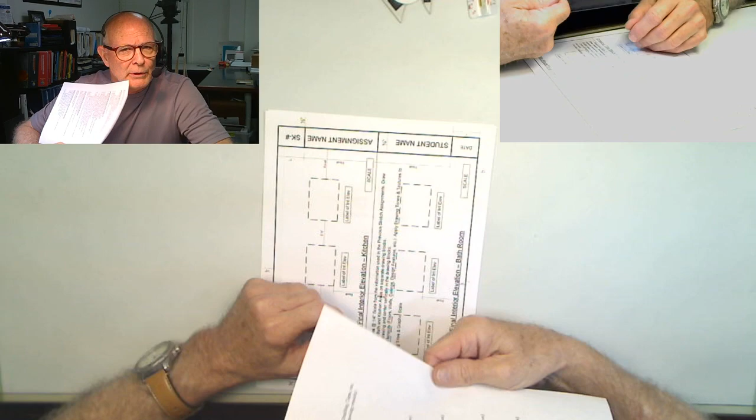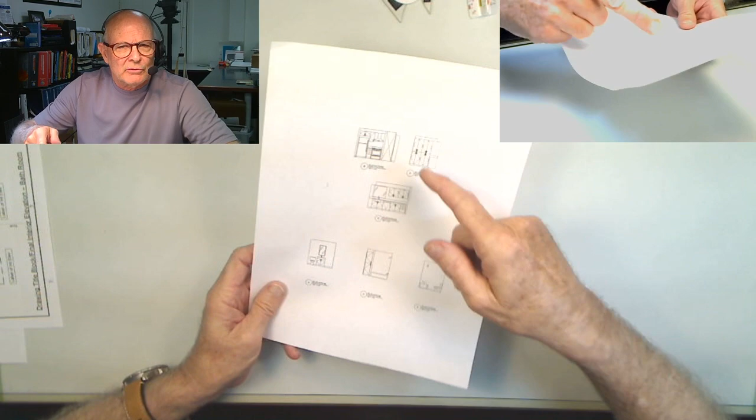As before, it's probably good to pull up some information that will be helpful during the assignment. I suggest you print out or at least have available the assignment so you can refer to it in case you need additional information. You'll want to get a copy of the drawing format so you'll know where we're going with the finished project, and some additional information in terms of example elevations that we can compare to as we progress with our own drawings. So having that available is a good starting point.

It's probably appropriate to stop at this point and think about these drawings as being just a continuation of those orthographic drawings we've been working on for quite a while now. These are, as I've referenced in the lecture, multi-view drawings. That description tells us that these multi-view drawings require multiple different illustrations to show one object. These interior elevations are just part of that group of drawings.

By the way, these are very important to interior design. These are some of the most prominent drawings that interior designers use in establishing the design as well as documenting the design requirements. So it's probably appropriate at this stage to take a look at some information we looked at in the lecture, maybe in a little bit more detail.

That detail has to do with the orientation of the interior elevation. We have a symbol that is used to represent the interior elevations that need to be represented. It's basically a square turned on 45 degrees with a circle in the center. This is an enlarged view of the symbol - the symbol is typically much smaller and is represented down here.

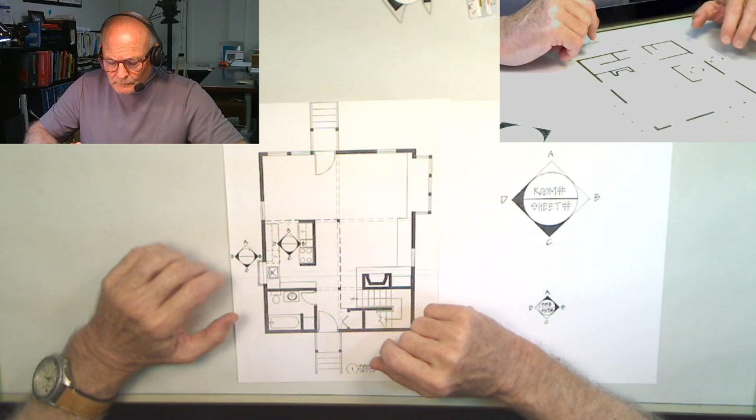So how does that really work? We know the symbol, but how does it work with a plan? We will be doing two sets of interior elevations today. For purposes of the demonstration, we're going to focus primarily on the kitchen area, and you will be taking the information here and applying it to the bathroom area in a very similar way.

As we look at the kitchen area, I'm going to cover up this symbol for just a moment. I want you to observe that the plan is right reading - we're not doing anything tricky with the orientation. You can read all the symbols and all the information correctly. That's why I'm referencing the right reading, because your interior elevation symbol needs to refer to the drawing in that orientation.

So we place the symbol on the plan. Now, you do not have to do this on schematic design information, which is primarily what we're working on. You do not have to put this on your plan, but you need to understand how it relates to the plan. If you wanted to, you're welcome to take a piece of trace paper and put it on there if that would be helpful. But understand that A is always at the top, B is at the 3 o'clock or right directional side of the symbol, C is at the bottom, and D is at the left side or 9 o'clock orientation.

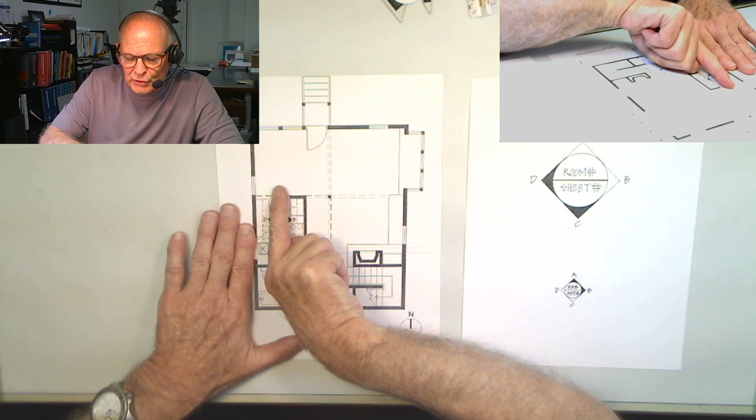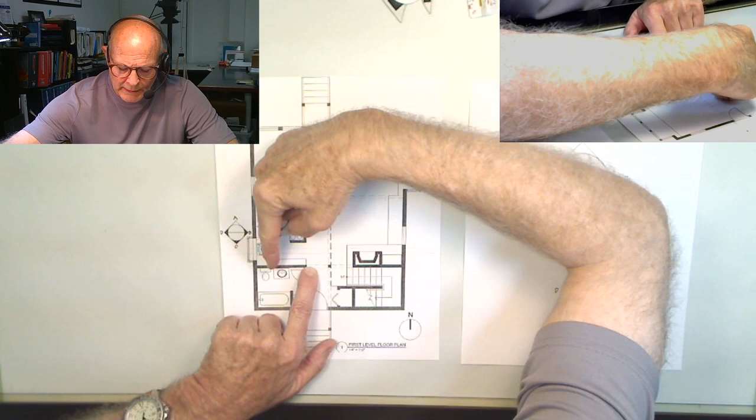So what that's really doing: when I want to look this way at an elevation, that will be A. If I want to look at the right side of the plan, I'm referencing a B elevation, and that represents from this wall to this wall. Similarly, C would be looking this way, going from this side of the plan drawing all the way to this side, and D would go from this side to this side, illustrating all those features of the design.

Sometimes we end up with drawings that are very small, and the space just doesn't permit enough room to put the symbol in the middle of the space. In that case, we set the symbol outside, but understand its orientation and directionality are exactly the same as if you put it in the center.

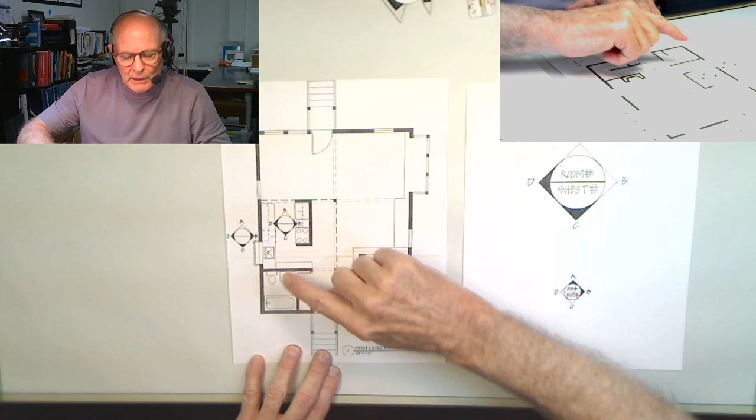So if we were taking this symbol and applying it to the bathroom area, we would come down with a leader and indicate that this set of interior elevations is applicable to this space. With that in mind, we follow the same rules used when looking at the kitchen: this, by representation, is the A elevation, this is the B elevation, this is the C elevation, and this is the D elevation. So A, B, C, D.

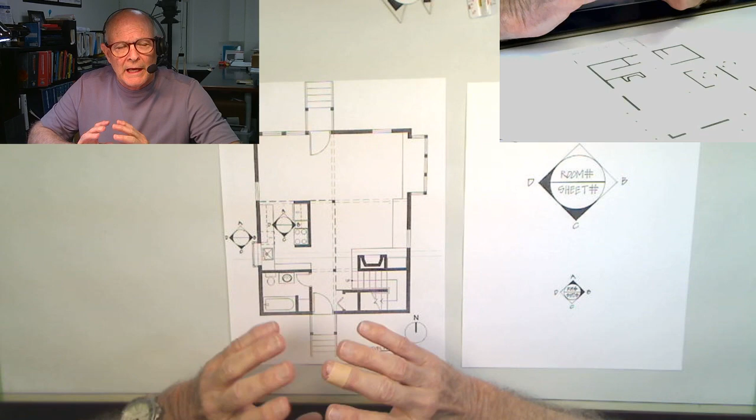Whether the symbol is placed outside somewhere or on the plan itself, those orientations do not change. As a result, we have a standardized symbol used throughout the industry, referenced as A, B, C, D. There are some variances on that, covered I think in the lecture, but for our assignment, A, B, C, D are our primary elevations we'll be working with.

As a result, there will be more on the actual arrangement on the sheet a bit later, and that's again covered in the formatting sheet provided to you in the assignment.

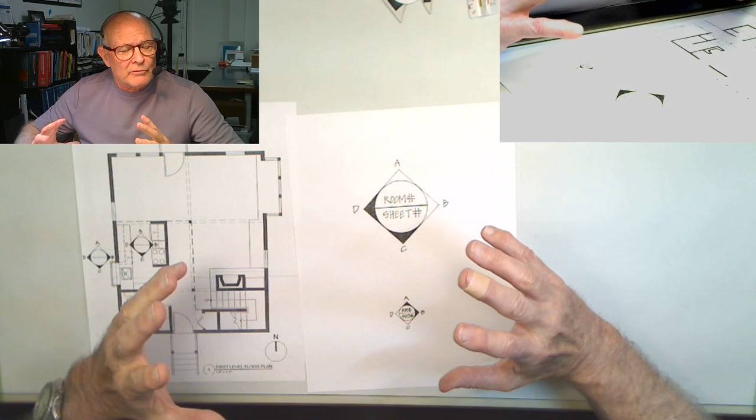Referring back to my notes, one other quick thing I forgot to mention: we don't always elevate every interior elevation. Sometimes the elevations are not that important, they don't show anything special. So we need to think about what is important in the plan view that needs to be looked at, and as a result we end up with some walls not being elevated. If we had a lot of time and drawing space, we could do all of them, but for expediency most architects and designers only do those drawings absolutely necessary to articulate the design fully.

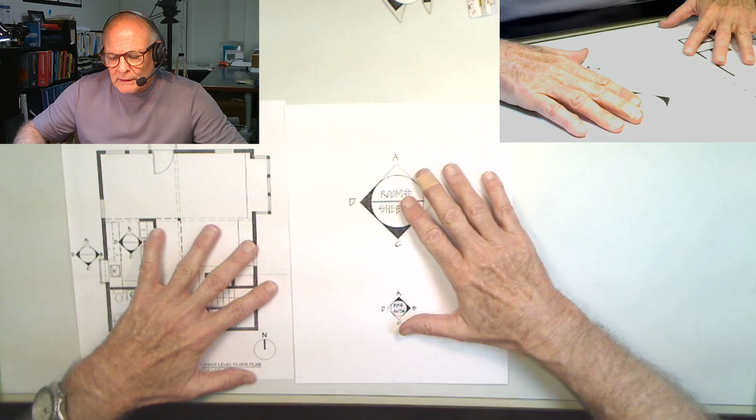Let me talk a little about this—I forgot to mention just previously that the way we indicate that is by pocheting the directionality. When we poche this side of the symbol, we're indicating a D elevation will be drawn as part of the interior elevations. In this particular case, we're seeing that the C elevation would be called out.

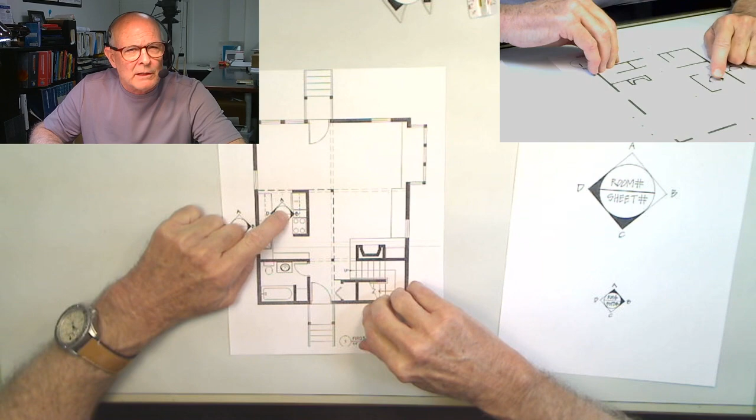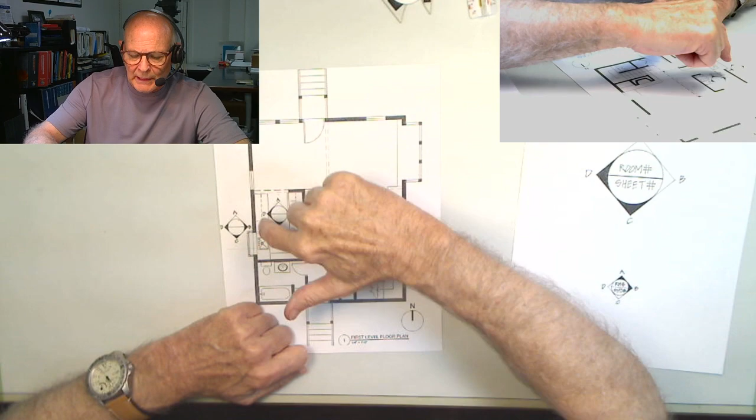Now, as we look at the examples we're working with today, we're not going to do elevation A because there's not that much—it's kind of wide open there and won't indicate much for describing the design features. But B does show a lot of design pieces, so we're going to poche the B designation and elevate that wall. As you can see, C and D are pocheted, so in a similar way we're going to elevate elevation C and elevation D in this assignment.

So hopefully that helps to clarify how the symbol works and how we come up with these types of designations.

Moving on now to other parts of the assignment, let's start on the requirements for this drawing. As I mentioned, this is a multi-view drawing. These drawings require that we take a look at multiple references, and this should be nothing new since you've been using this approach since the section elevation. We've been using other references to help guide us through the drawing and understand the exact design parameters and features.

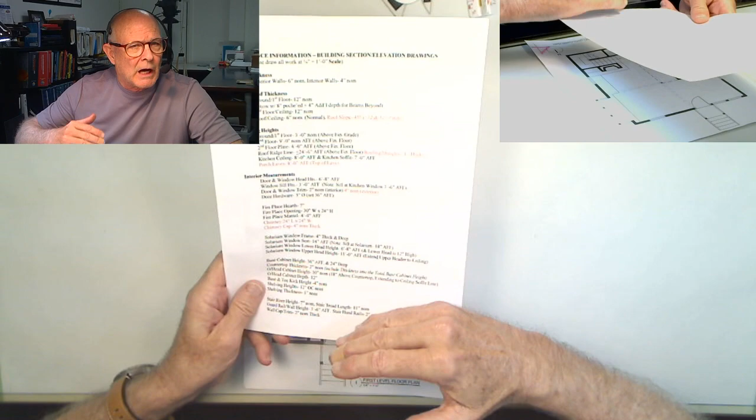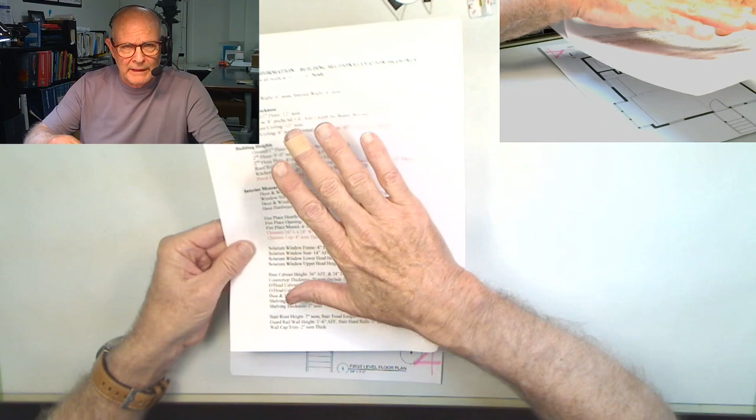So the first thing we're going to do is go back to the floor plan, because that's an important piece and we'll be using the information very directly from it. In addition, we also need to refer back to our section information, both graphic and text, because that will help with certain heights. Just like we did on the exterior elevation drawings and on the section drawings, we use the plan to locate the feature left to right, and we use the additional section information to provide height requirements.

So that should help us in navigating our way through this assignment. As we start remembering our symbols here, we want to think about how do we orient the drawing in such a way that it becomes helpful to us.

In this exercise, I'm going to be using 8.5 by 11s instead of the 11 by 17. Later in the assignment, we will look at the larger drawing for all the things that need to be formatted and provided on it. But for right now, we're going to use just 8.5 by 11s because they're easier to work with and easier to align than the large sheet.

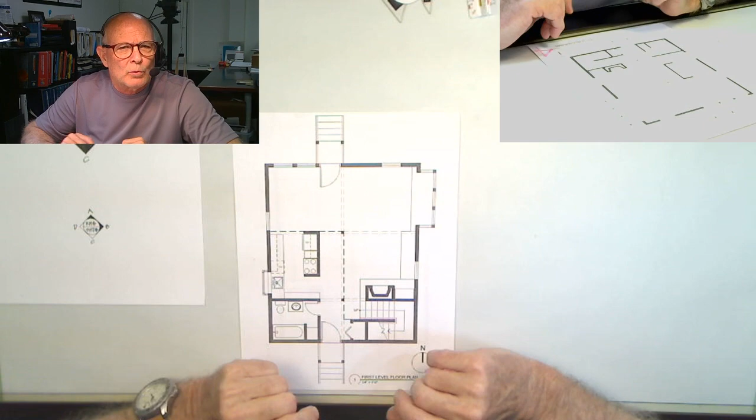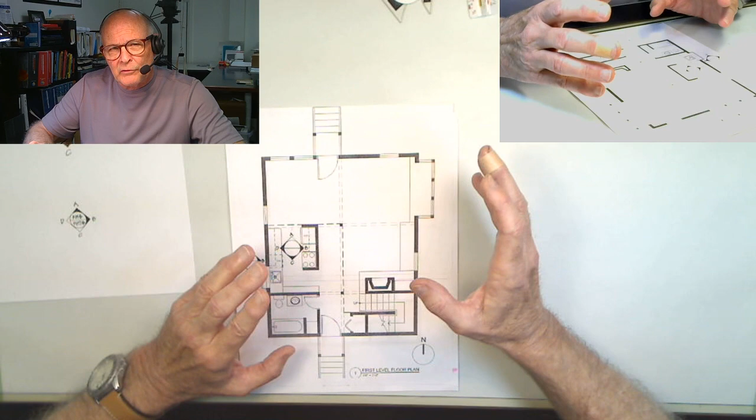As I've mentioned, in our example here, we're not going to be doing A. Our drawing needs to be turned and oriented in such a way as to make it easy to reference, and oriented correctly for the elevation that we're going to be drawing. So with that in mind, let's start.

As mentioned, we're going to be starting with elevation B, which is this elevation here. That means that we need to rotate this drawing, or the plan drawing, in such a way that we have a horizontal representation of the elevation that we're going to be looking at.

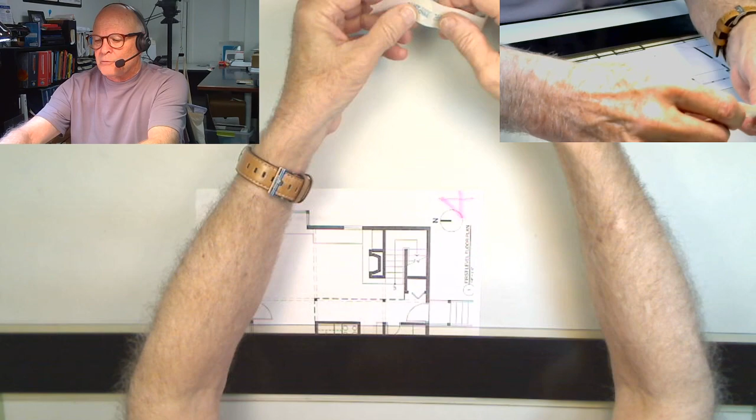We're going to want to tape that down that way so that we can then go on to the next step of the drawing. So as we've done in the past, let's go ahead and align the drawing and tape it down so that we can have it ready for the elevation drawing.

Okay, so there it is. Now we're going to take a new sheet, 8.5 by 11, and place it in such a way that that elevation is approximately in the middle.

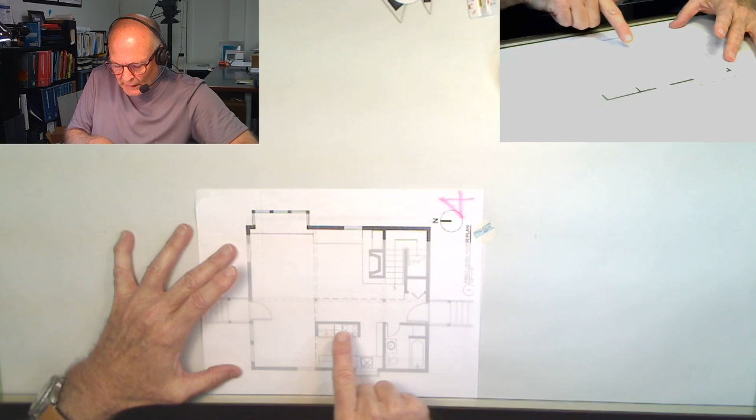The elevation for this kitchen is not just of this wall, but actually extends all the way over to this wall here. And since we're looking at it from here to here, we're going to need that full expanse of space to make that work. So let's go ahead and tape down a sheet of vellum for that elevation.

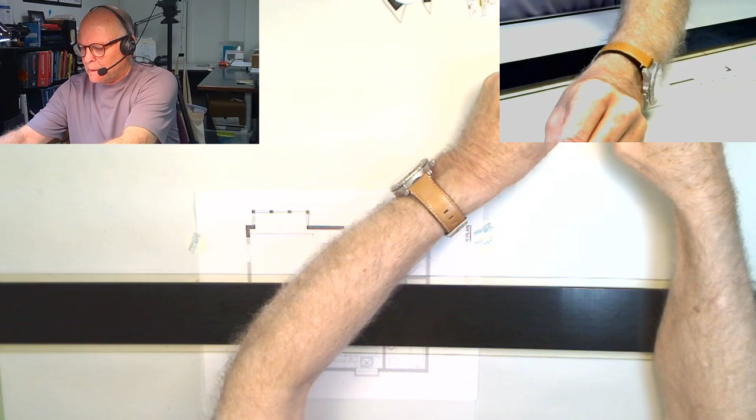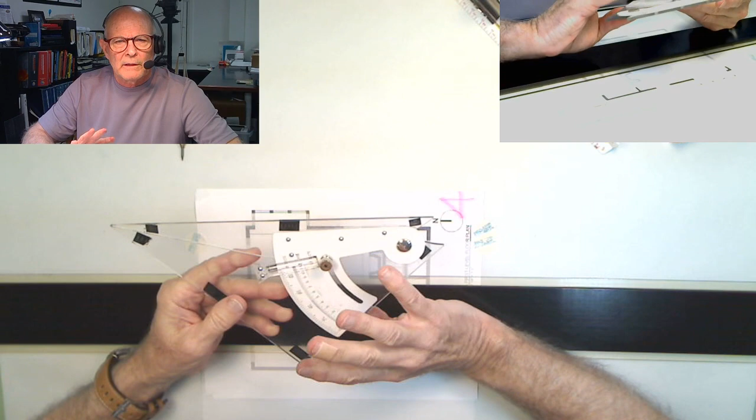The tools that we'll need are very basic. We need the architectural scale, 1/4 inch. Need the triangle, 90 degree or 45 or 30/60 is fine. Doesn't really matter in this particular case, although I think 45 will probably be a little bit more handy. Then we just need our pencil and eraser to do the drawing.

As we start, one of the things we want to refer to is the section drawing. And in the section drawing, one of the things we determined was that there is a ceiling height in the kitchen. That ceiling height was provided in the graphic.

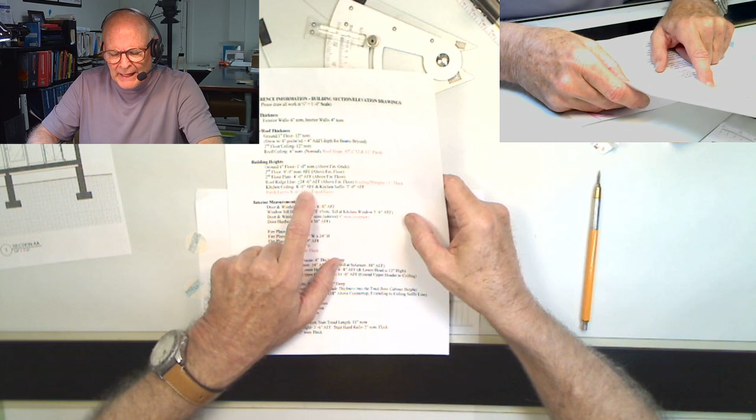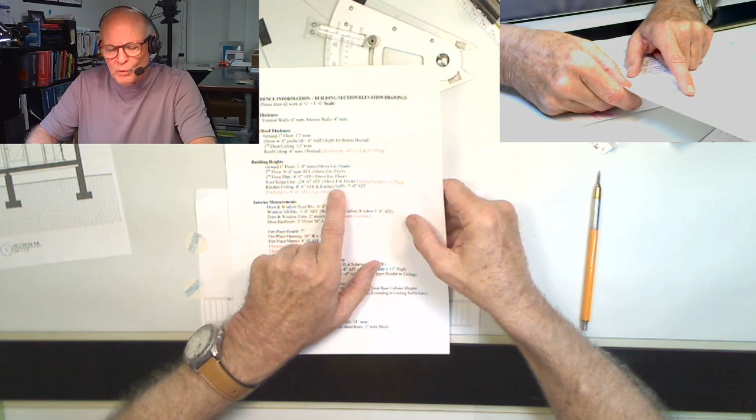You could either scale it off the drawing, or we could take a look at the specific heights provided in the plan. If you look at the information here, it says that the ceiling height in the kitchen is 8 foot above finished floor, and that there's a soffit at 7 foot high represented there also. So we'll come back to that in a bit, but just understand that we're working with an 8 foot ceiling height.

So to draw this elevation, simply start somewhere lower down here underneath the drawing and draw a line across, and set that as your finished floor height. You might want to mark it FF for finished floor so you know what that represents.

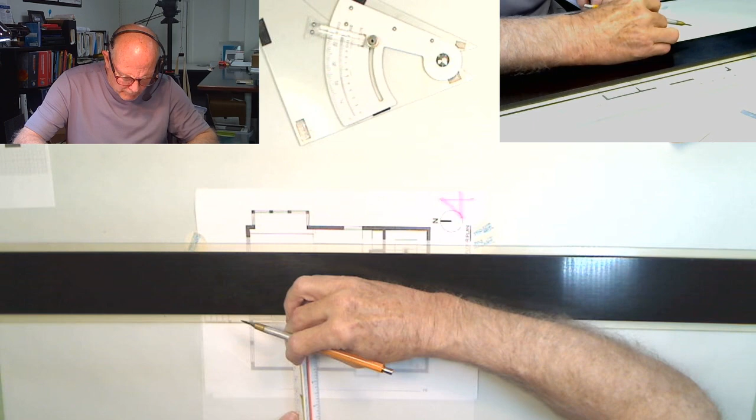Now, we know that the height of this ceiling is 8 foot. So what we're going to do is measure, mark, and draw another horizontal line at 8 foot above that finished floor. Having found that height, we mark it and we draw our ceiling line.

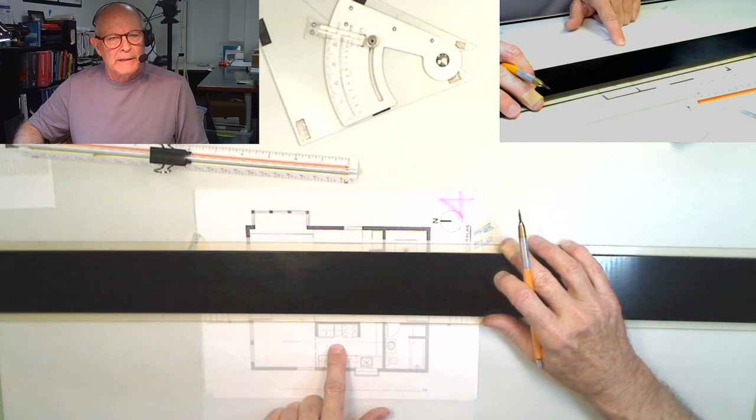So we have a floor height and we have a ceiling height represented here. Two parts of our boundary are established, our bottom and our top. Now, our next activity includes looking at the floor plan below and finding the left and right boundaries that will help us establish the full parameters of the interior elevation.

So looking at the elevation, we want to only focus on the interior side of the elevation affected. We're not concerned about the outside wall. We're more concerned about this inside line, and that's the boundary line right there.

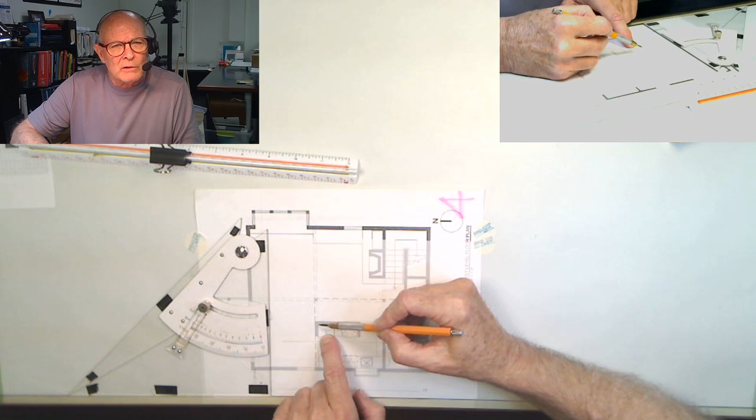So we're going to mark that as our left boundary line of this interior elevation. We're going to line it up and draw from the floor to the ceiling and stop right there. We're going to do the same thing on this side. Our plan indicates that the wall, again inside, not the outside of the wall, but the inside of the wall for that kitchen area occurs right here.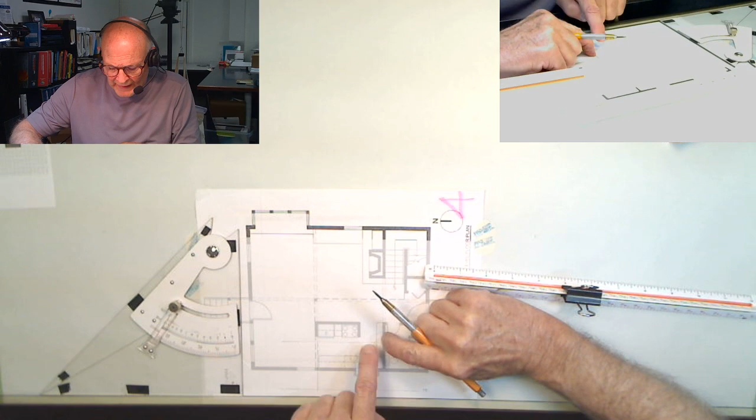So we're going to do the same thing: draw a line from the ceiling down to the floor, from the floor up to the ceiling, however it works for you. That's going to define that rectangular form and give us the limits or boundaries of our interior elevation. So we're only focusing on this little area. It's very simple, and these drawings can go rather quickly.

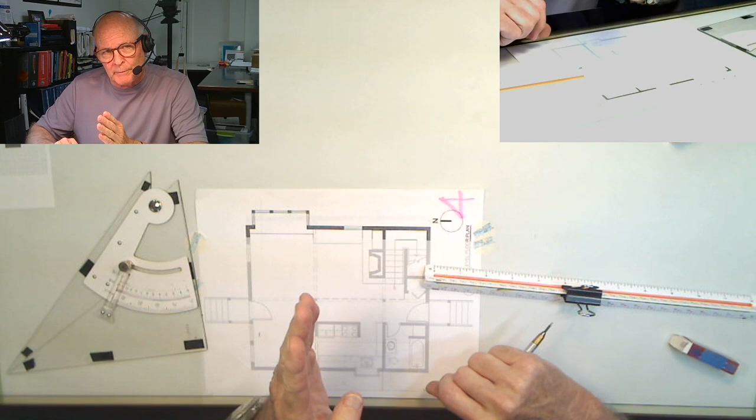As we've done in the exterior elevation, we found all our vertical edges of those features and marked them with a vertical line that gave us a place to define the edge of that feature. I'm going to start on the left side and go towards the right, and we're just going to look at all the elements that would be exposed in this interior elevation.

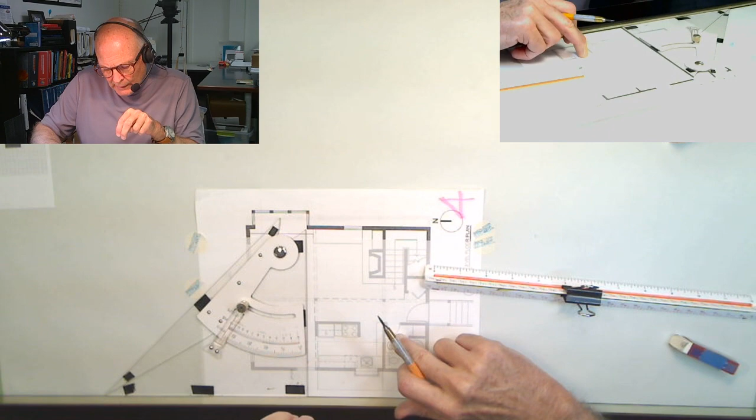So kind of projecting your view into that space, the first line we've established is the inside wall. Next we're going to see a line for a refrigerator, right there, and then another line right next to it, which represents some cabinetry. Let me get that on there just a little different.

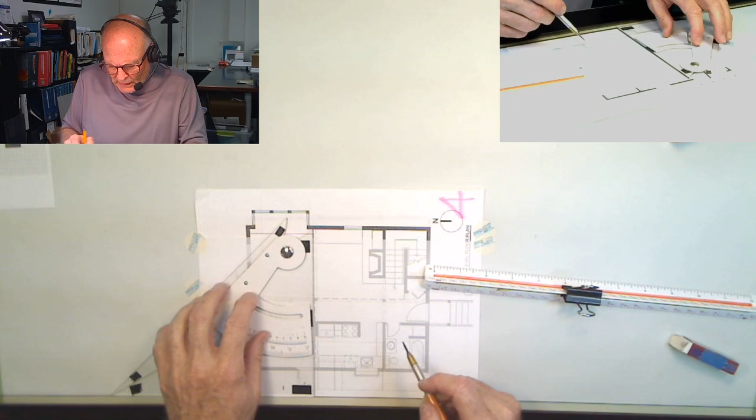Next we're going to have another line for the edge of the cabinetry, so we'll mark that. And the next item is the range or oven, right next to the cabinet, extending all the way over to this wall. Now this wall, we're going to see an end wall condition, and you'll see how we do that in a minute. Basically we're going to stop the range right at the inside of that wall. So I've marked that one.

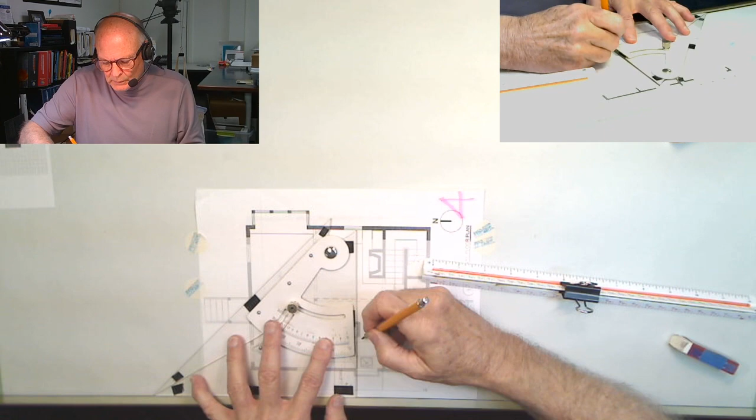Next we're going to show the extent of the wall, so we see the end of that condition. Then moving across, we're going to see some cabinetry, then a final wall. We don't have to measure, we can just mark it. So the first line we come to is that line where the cabinetry is, so let's extend that line up, and then we have the final line for the wall itself.

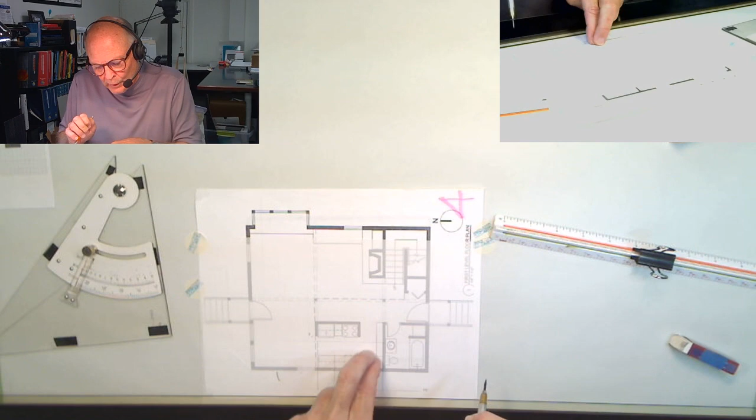So what we have in the plan so far is the left side wall, the refrigerator just marked as edges, the cabinetry, the range, the little end wall condition, the opening for accessing the kitchen, the pantry cabinet, and then the finish wall there. So all those are lined out now.

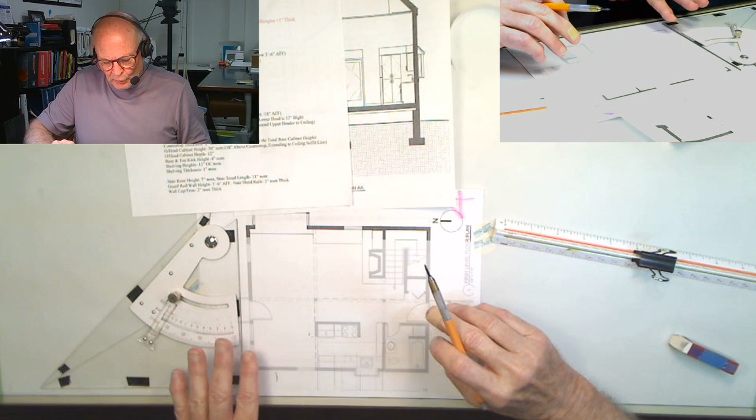Now what we're going to do is use our section drawing, just as we've done before, along with the text information to find our heights. Let's start with the idea that the cabinetry is pretty well defined. If you remember, the cabinetry is going to be at 36 inches, so I can mark that. Move my parallel here, and that's going to be at 3 feet on the elevation.

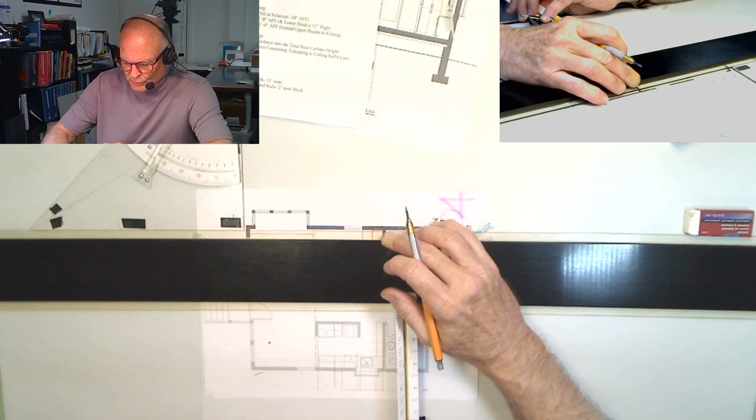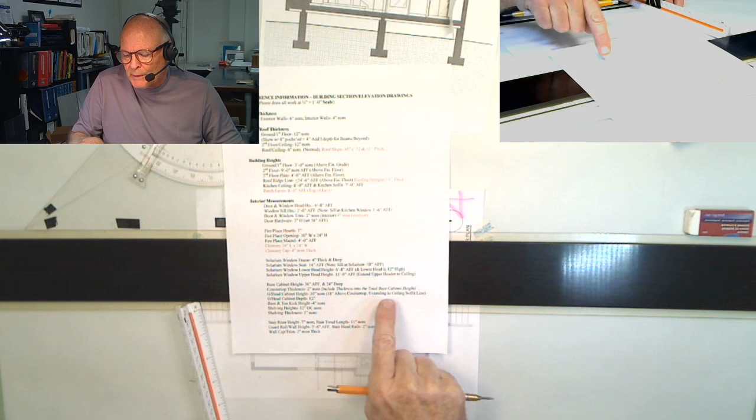Rather small piece of cabinetry, but we have another piece of cabinetry above that, and that starts, I believe, 18 inches above the countertop and extends to the soffit line. Now if you remember, we talked about the soffit line coming down to 7 foot, so we could go ahead and draw that in as a line as well.

So let's go ahead and set that. We know that the ceiling line is right here, and we're going to come down 1 foot and set that.

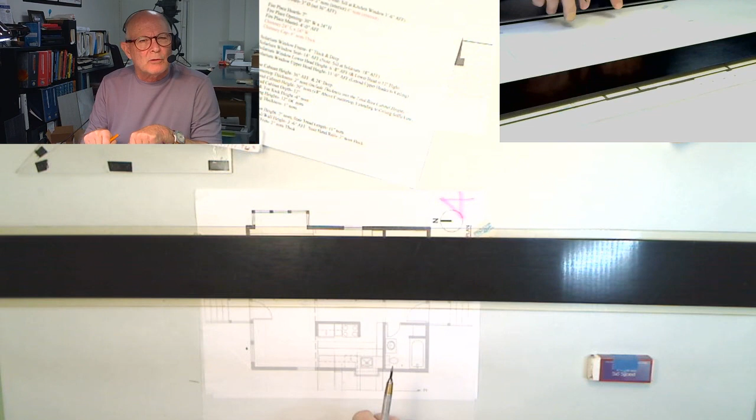Now, for purposes of being able to see this a little better, I'm going to take just a minute and draw this information in a little bit bolder so you can see the drawing just a bit better than my rough marks.

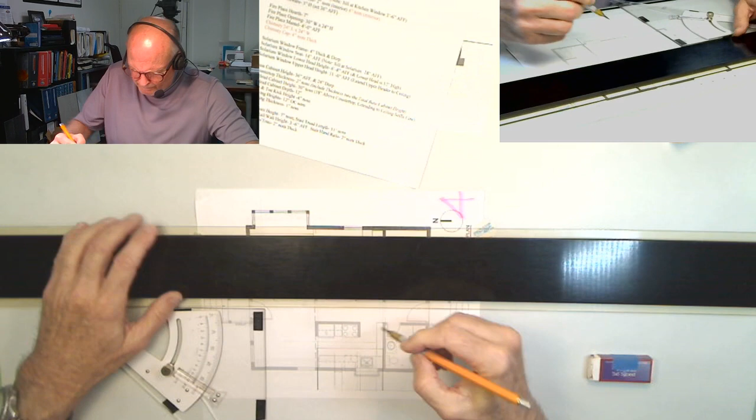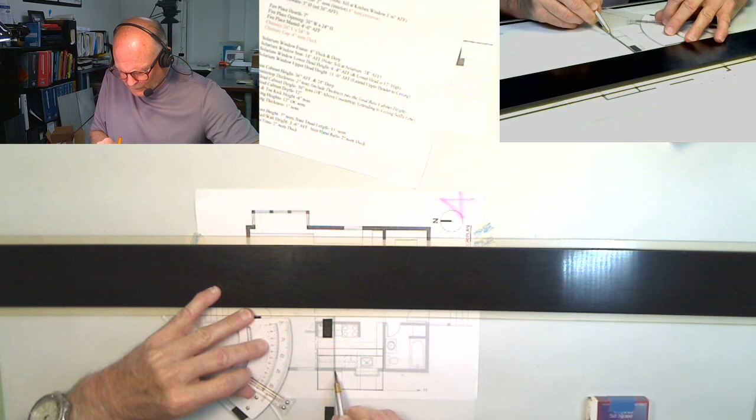Okay, so we'll put that soffit line in. There it goes. Now we're going to put in our countertop. We have, let me go ahead and put in the base of the counter. Okay, we have an end wall condition here.

Let's see if we can grab our example drawings here. Right here, so we can look at those a little closer.

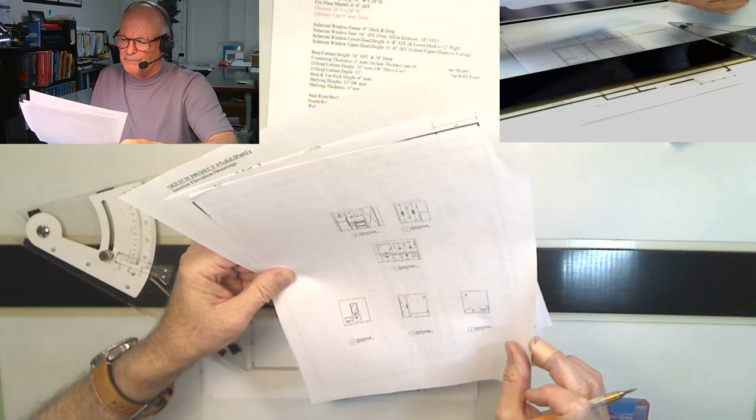Okay, so what we observe in our example is that we have a refrigerator, you can see that here. We can see some cabinetry, and we have overhead cabinetry in kind of an interesting formation. But if you look at your cabinetry in your home, you'll find that if there's cabinetry over the refrigerator, it tends to be a little bit shallower or lifted up higher so that the refrigerator fits underneath it. And the cabinet remaining over the base cabinet, that overhead piece, is one that fits within the conventions of regular heights we have on our section elevation.

We also have a refrigerator, a range or oven, and then a hood. We'll talk about those in just a minute, but we're just blocking out the elevations right now. Good to have this around so we can take a look at it.

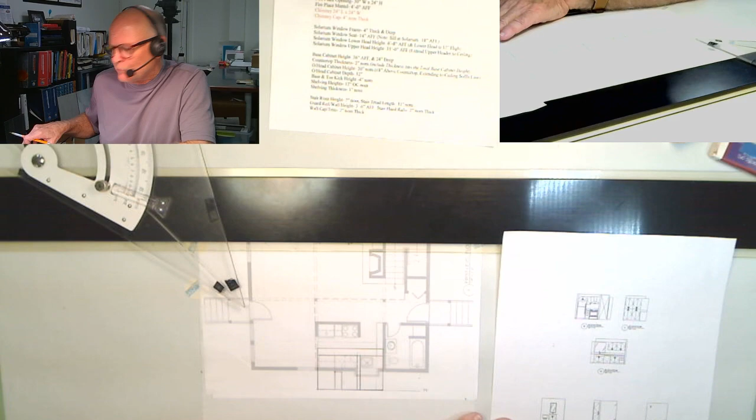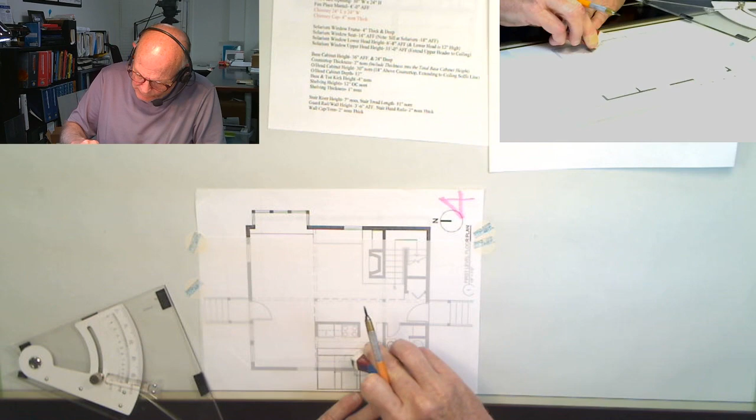Okay, so one of the things I observed here is that our soffit doesn't necessarily extend all the way across the opening. So I'm going to go ahead and pull that back a little bit and elevate that just a little bit differently.

All right, so we have the main part of the kitchen covered here in terms of construction. We'll add the appliances in just a minute. And we have an opening, and then a pantry adjacent to the sidewall here. You see it right there, so I'm going to go ahead and draw it in. It does have a soffit there, so we need to observe that.

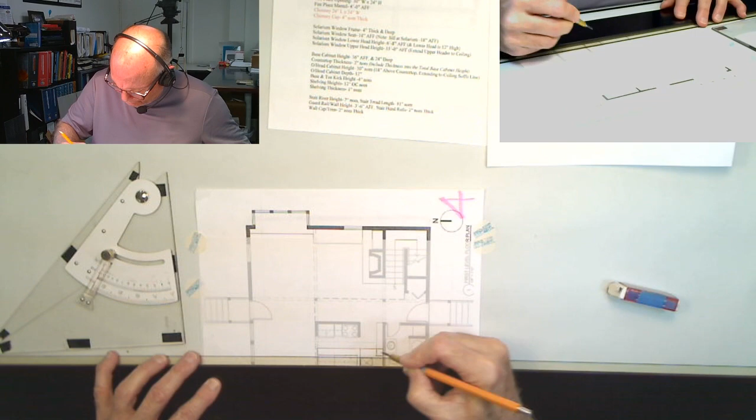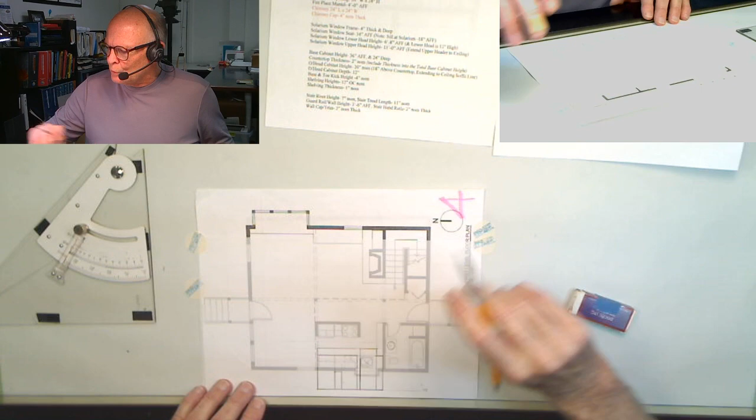Okay, so we have the cabinet. Some pieces that we need to put in, as we look at our examples, is we have a toe kick that's 4 inches high. It occurs in the side view of the cabinetry here and in the front view of the cabinetry here. So I'm going to measure that, and those tend to be about 4 inches by 4 inches. Clean that up a little bit.

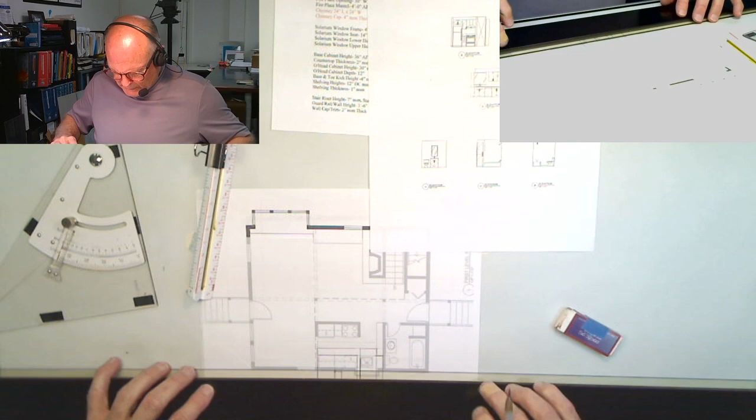Okay, and then we have one last bit. We need our overhead cabinet here. Yep, that's it. Okay, good.

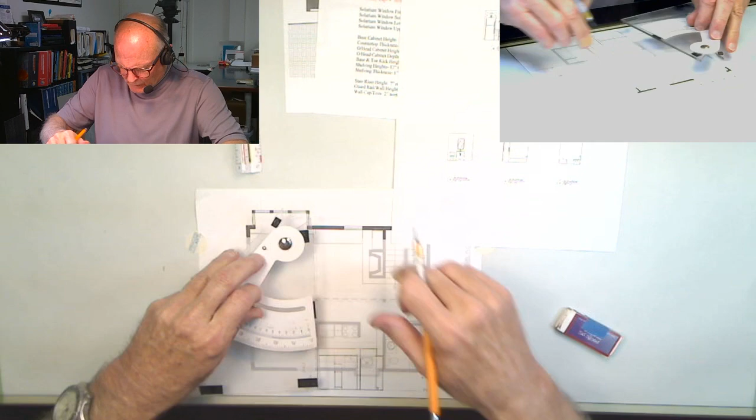Sorry, I had a misreference on some of my heights here. It can get a little confusing sometimes, even for someone who's done it a number of times. So we want to make sure that our heights are correct.

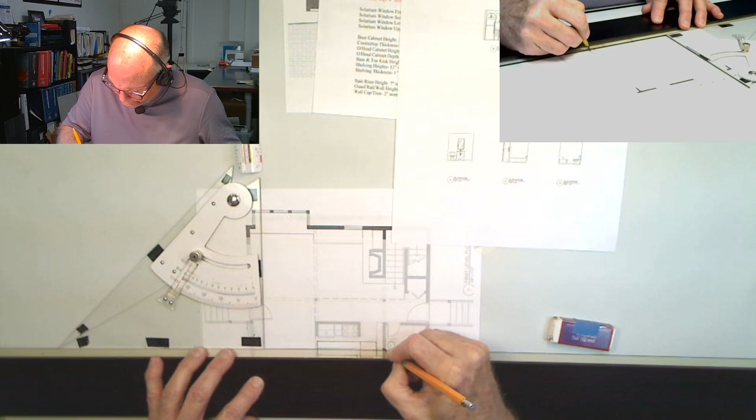And here's the soffit line. Here. So: ceiling, soffit, ceiling, soffit. Okay.

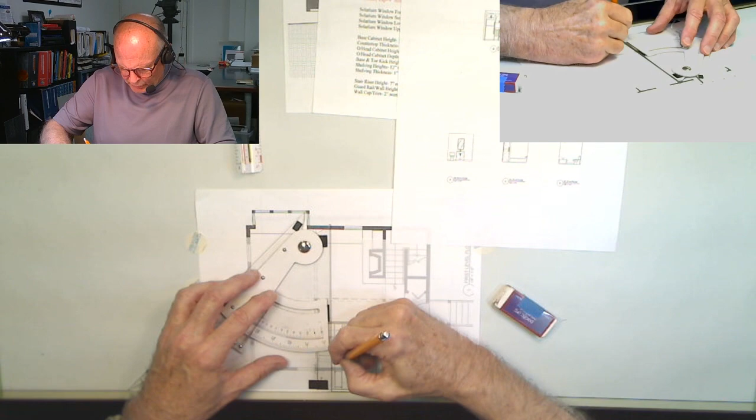Now, as I was looking at our example, I observed my overhead cabinet was just a bit shorter than I thought it should be, and so I wanted to make sure I got that in correctly. Okay, so ceiling, soffit. And there's our soffit. Okay, so: floor, soffit, ceiling, cabinet overhead, cabinet base, and then here's our pantry.

So we used the plan to line up the objects we're going to be drawing, and we placed a vertical line to mark their location. Then we used the section information to find our heights, and some last minute things we need to do here are to think about some appliances.

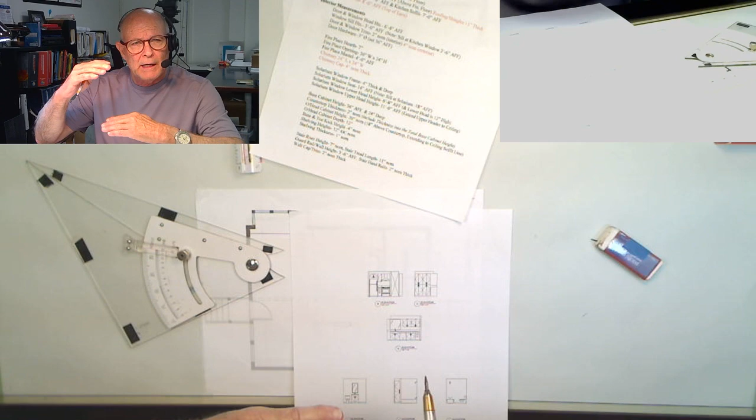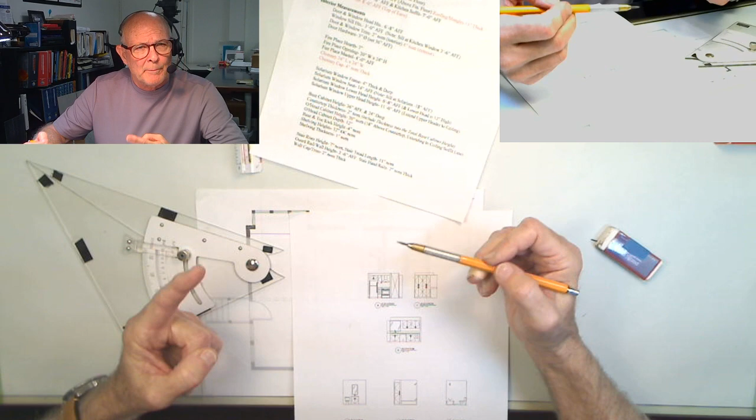Now, generally speaking, some things to think about are that there is some range in appliance sizes. Some appliances are more geared towards a custom installation. I'm going to let you take a look at your appliances in and around your kitchen area and see how tall they are. The width should be pretty common to what we've drawn here, but the heights might vary a little bit. So take a look and see how yours might vary slightly from ours.

Then, as we look at that, we want to consider the types of appliances. For example, let's look at the refrigerator. This has an upper compartment and a lower compartment. Some are side by side. There's a whole variety of different types and so on. I'll leave that to you. I'm not going to get too worked up over the specific size.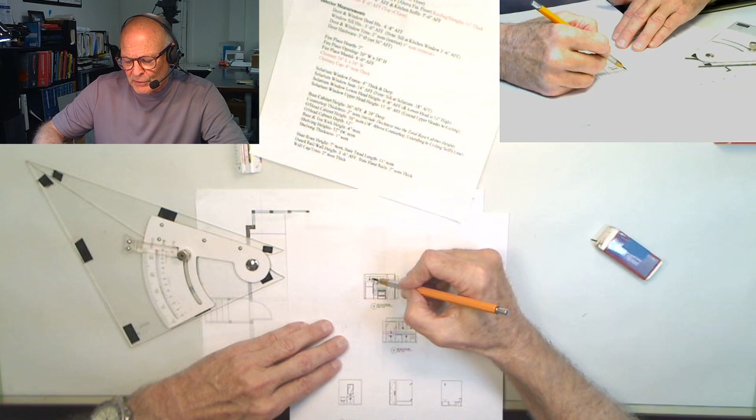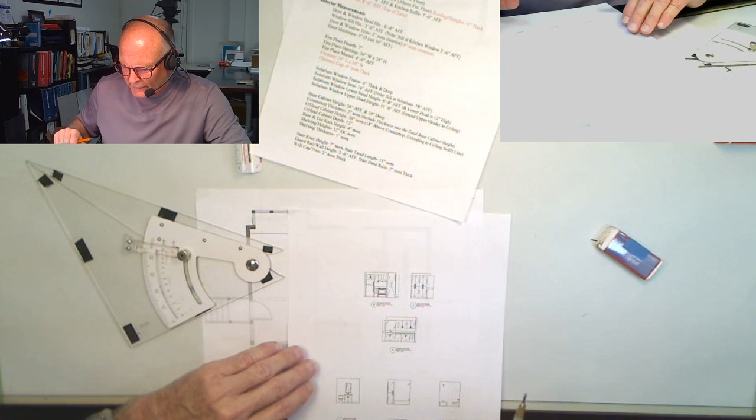But the one thing I did want to point out is that if you look relatively close, any overhead cabinetry tends to have about 6 inches of clearance between the bottom of the overhead cabinet and the appliance itself. This permits ventilation and exhaust of warm air in and around the coils of the refrigerator. So as a result, I'm going to measure down in this particular case probably about 18 inches for the overhead height on that cabinet, and I'll let you have some flexibility there.

Okay, so what we have is we've got overhead cabinets. We're going to go ahead and put in just a reference for the kitchen appliance, for the fridge, and for this purpose we're just going to draw something kind of simple.

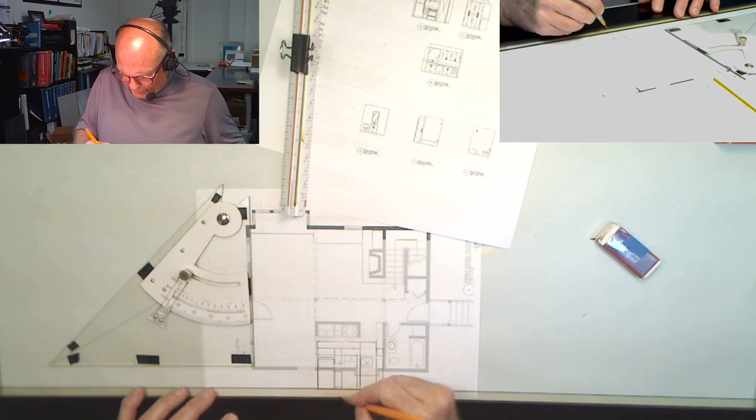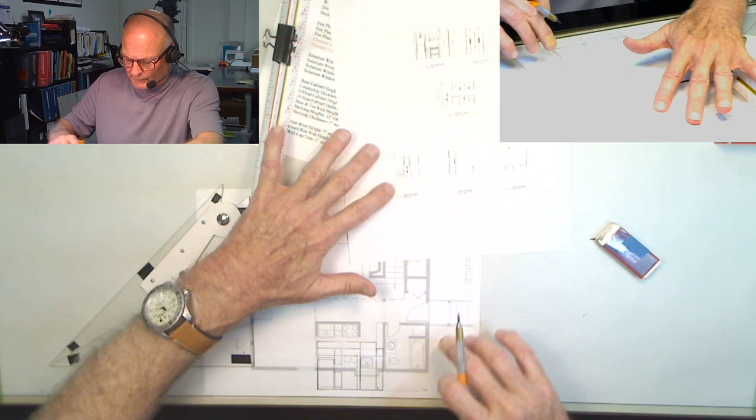Now, looking at the range, generally speaking, ovens and ranges line up with the countertop. So again, take a look at what you have at home—I'm sure it should be close to what's represented here. So the countertop and the top of the range are often at the same height. With that in mind, I'm going to extend the countertop over to the edge of the wall.

And I will permit you to do that same exercise that you did for the refrigerator with the oven appliance. You can see there's some basic information provided here. Take a closer look at it and add the elements in. There's some control devices, there's a drawer down below, there's an oven door, and there's even a backsplash panel that goes along the back of the wall.

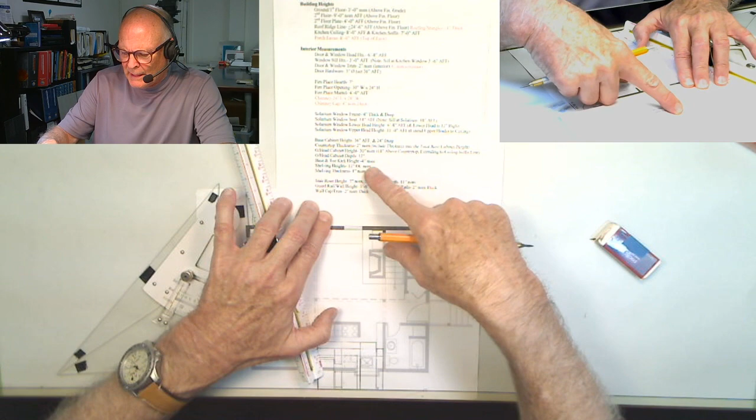And that tends to be about 3 or 4 inches high, depending on the model. But our plan will also include a 4-inch backsplash. So let's double check here. On our cabinets, we have a base that's 4 inches high. Let's see where our splash says we have 4-inch high... base cabinets 36.

Countertop thickness is 2, overhead is 18. We're not worried about overhead depth. Let's just make it 4 inches for lack of a better representation.

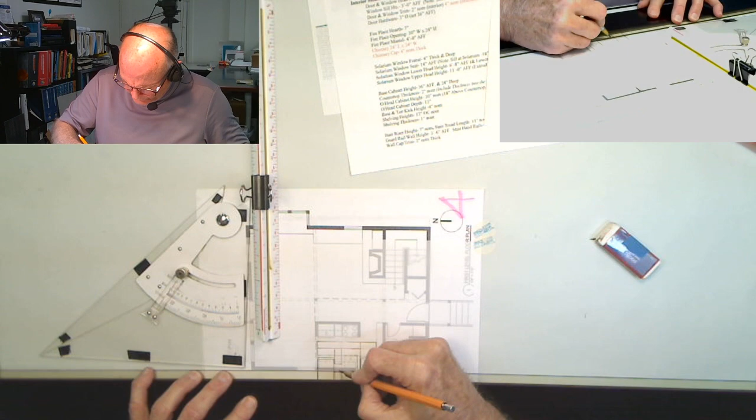With 4 inches for the cabinet backsplash, which protects the wall and usually occurs at the back of the lower base cabinet, it usually wants to match the toe kick in height, so you get comparable heights there. We're going to extend that back along the back of the oven range as well.

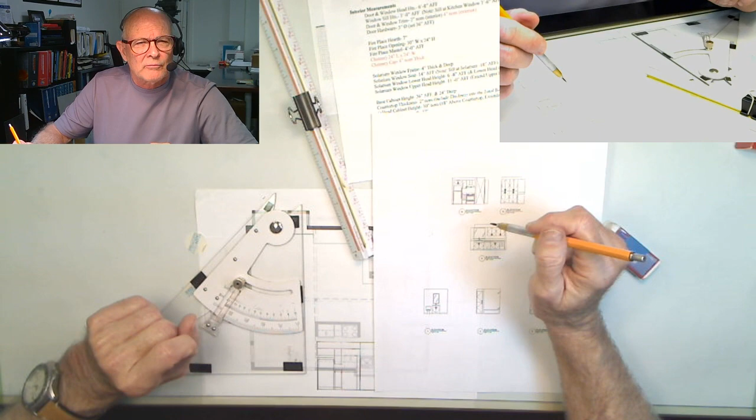Using the drawing, you can start to pick up parts and pieces as necessary. Take a look at the hood assembly. We've shown one here that's rather simplistic, and that's fine. There are different types, so take a look at one you may have at home. If not, feel free to copy this one, that's fine and acceptable for the assignment.

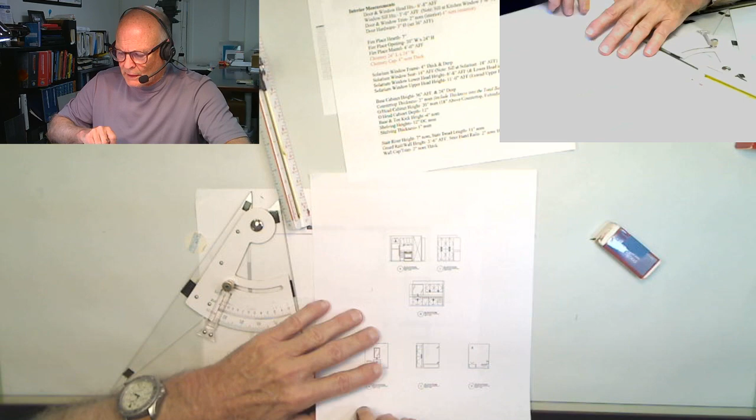The last bit is something we've talked about in lecture or our lab assignment for the section, and that is the topic of doors, cabinet doors. A quick review would indicate that we show the door hardware in the center because typically there's some hardware that assists with how that door operates, and then the hinges tend to be on the outside.

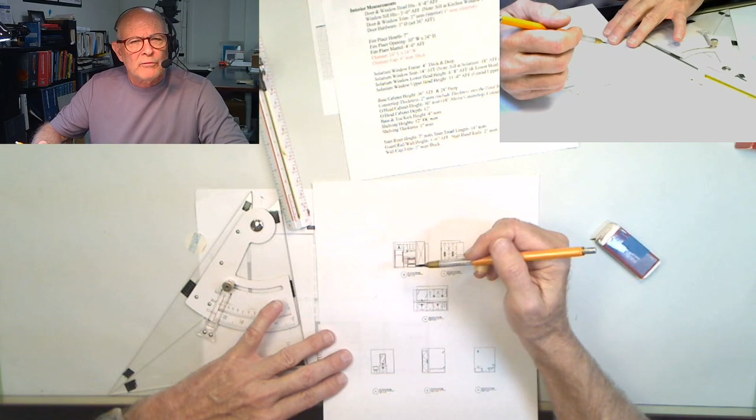The dashed and dotted lines that come down to a point indicate where the hinges are, and that shows how the doors operate. So over the refrigerator we have double doors, and over the low counter it's not big enough for double doors, so we just have a single door with the hinge side indicated as represented in the drawings.

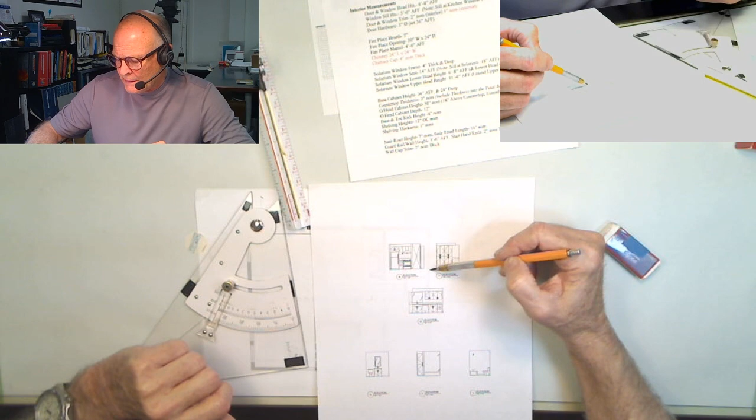One other thing you'll observe is that the blockout at the opening, this space right here, is represented by just an X, which usually indicates that it's open and there's nothing there. You could leave it blank, but it might be interpreted as a wall or something. So by putting an X there, we're indicating that it's a void or an open space beyond.

We do get a little bit of a view of the side view of the cabinet. I'm not going to get into the cross sections of that—that's something we do in the 220 class. But in this case, it's nice to represent that there is something there underneath that soffit.

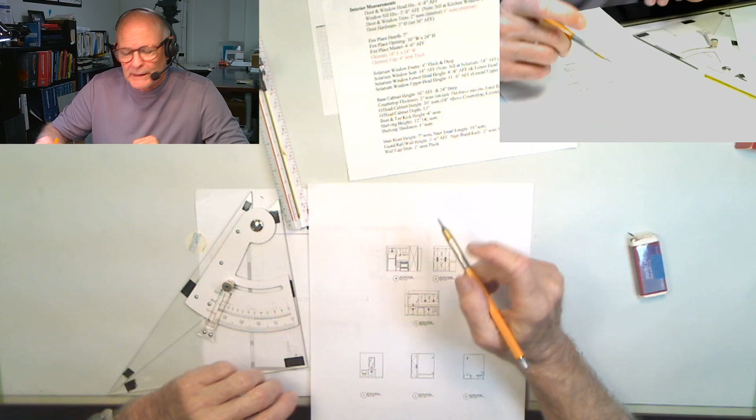After we've drawn in our elements for the various appliances, let me finish this piece here, and it goes up to there. Getting that cleaned up, what we have is the general shape of the room.

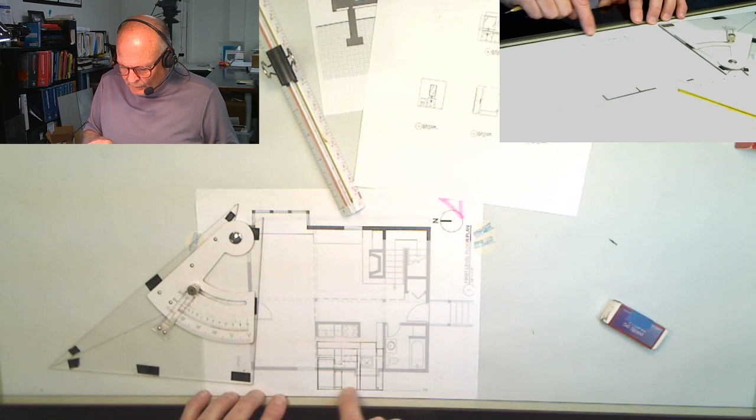We have some soffits in there, a block out for where the appliance side is right here, an opening, and a pantry. Hopefully that makes sense the way we've arranged it and how it's gotten placed on the drawing.

At this point, it's good to take a closer look, as we've been talking about, at the specific details about the hood, about the range or oven, and about the refrigerator, and taking a look at how those are represented and shown. We want to make sure all that information gets put in this rough blockout, so when we draw it later in the final drawing, all the parts and pieces are there.

After you've completed this, it's appropriate to take this drawing, set it aside for reference, and then we'll move on to the next elevation. I'm going to close this piece of the video and start up the next elevation in just a moment.